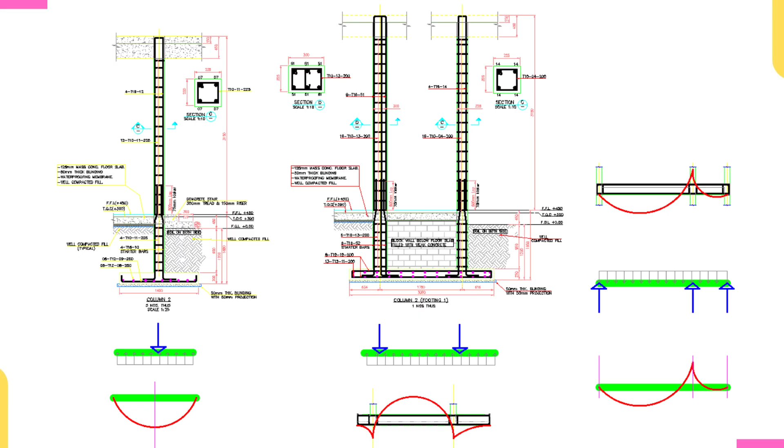I will start by first explaining the basics, which is why the tension zone in every beam must be reinforced. As we all know, if a uniformly distributed load or even a point load is applied to a beam, that beam will be subjected to tension and also to compression. Look at it, the bottom part will be subjected to tension, while the top part will be subjected to compression. What do we mean by tension? We mean by tension that it will be stretched apart, and compression in the sense that they

will be coming together. And as we all know, concrete in general is very weak in tension. Once it is subjected to tension, it will stretch apart, which will result in failure. So for that reason, in every beam, we always reinforce the tension zone, because concrete is very weak in tension, and once a beam is subjected to any load, this tension zone is prone to failure. That is why in all our beams, we always reinforce our tension zone.

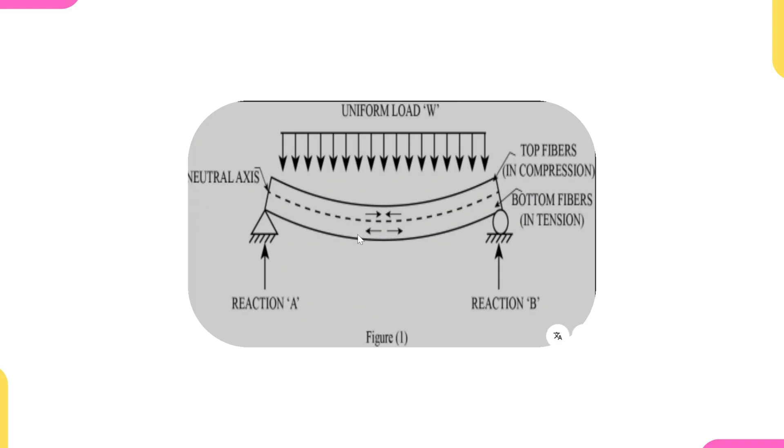Then coming over to a cantilever, as we have explained before, concrete is very weak in tension. If this is a cantilever and we apply a load at the extreme, the top part will be the one in tension, while the bottom will be the one in compression. Once we apply a load to this beam, it is the top part that will be stretched out, and this stretched part is in tension. If it is not properly reinforced, it will fail from this tension zone, because concrete is generally weak in tension and very good in compression. This compression zone will not fail, but as a result of the tension zone failing, the compression zone will also fail.

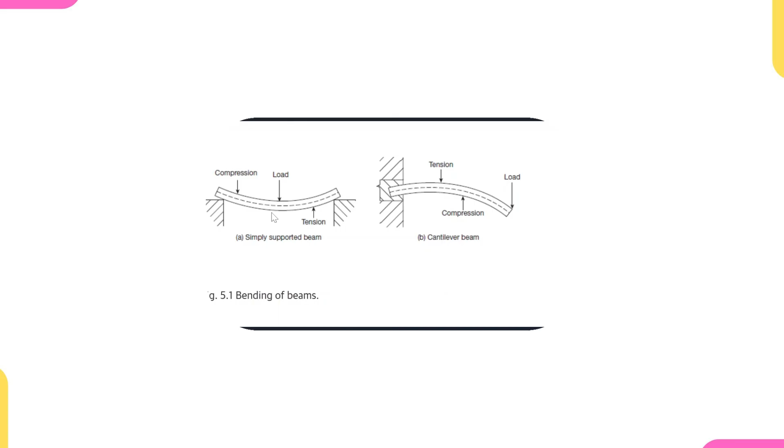So to counter this, in cantilevers we provide reinforcement at the top portion, while in beams we provide reinforcement at the bottom portion, but this is only applicable to simply supported beams. In continuous beams, the support parts are subjected to tension, but we'll explain that later. I just want you to understand that in a cantilever, the top part is the one subjected to tension, and in a simply supported beam, the bottom part is the one subjected to tension. And concrete is very weak in tension. That is why we always reinforce the tension zones.

So let's now come over to combined footing and isolated footing. I'll explain using this diagram below. But first of all, let me explain combined footing before going over to isolated footing. First, this is the footing base, which is this one in green color, while this is the column, and this column is transferring its load to this footing base.

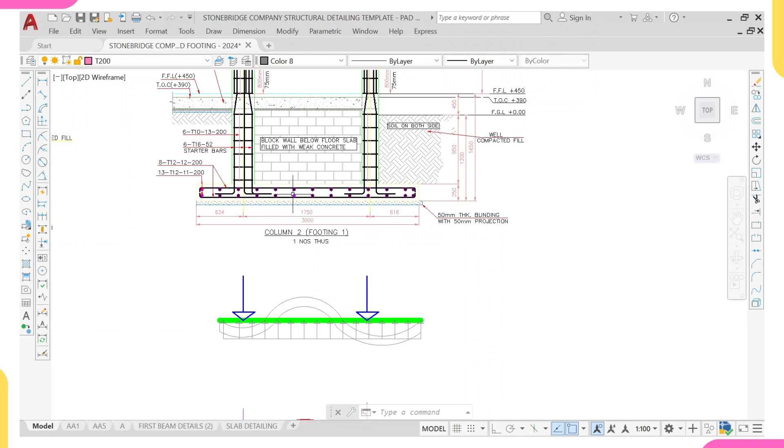And so look at this point load now. This point load means column. This point load is something as this column. It is transferring its load to this footing base, which is this one in green color. Then we are having this uniform distributed load, which is the soil. It will try to resist the load that this column base is transferring to it.

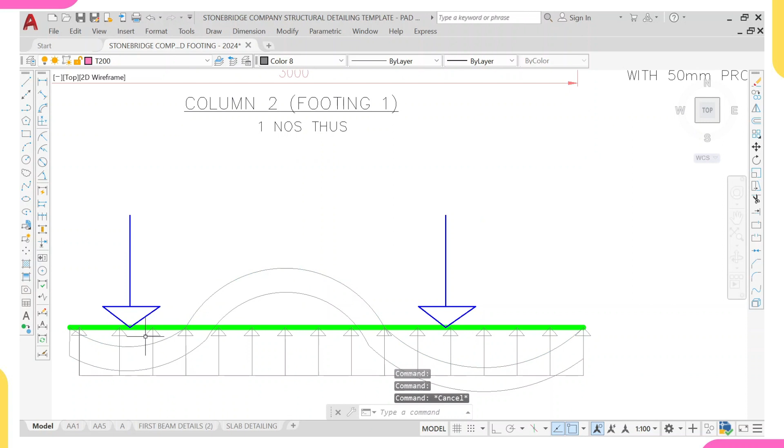So these ones now are just the way this beam, this footing base, will deflect under this column load. That's these ones, and then these ones. It's just the way this footing base will deflect under this load. So let me explain it now. So if this column transfers its load, this beam will deflect like this, meaning that this top part will be under compression and this bottom part will be under tension, meaning that we'll have to reinforce this bottom part.

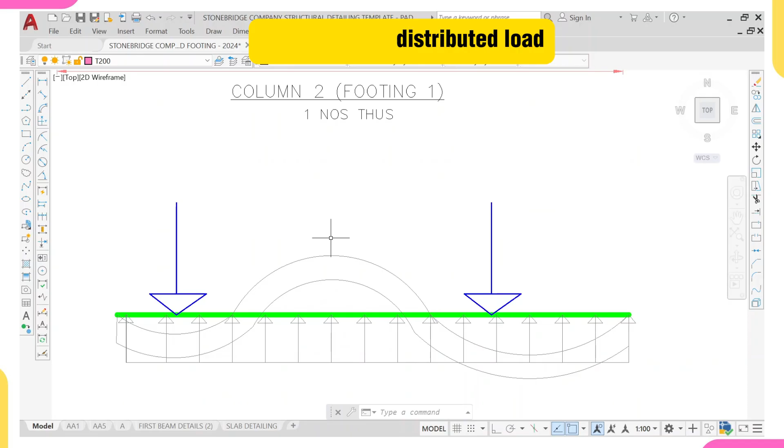Coming over to this point, the only load being applied to this footing base is this soil, which is this UDL. So this UDL will try to deflect this beam upward like this, meaning that this top part will now be under tension, while this bottom part will now be under compression. Take note, at this point now, this top part is under compression, while this bottom part is under tension.

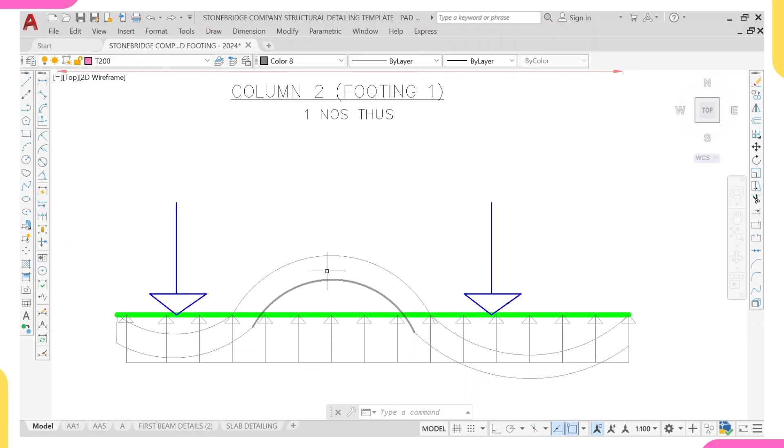While at this point, this top part is under tension and this bottom part is under compression, meaning that within this portion we will need to reinforce this top part, because it's this top part that is under tension. While coming over to this point now, this column load will cause this thing to deflect downward, meaning that this top part will be under compression and this bottom part will be under tension.

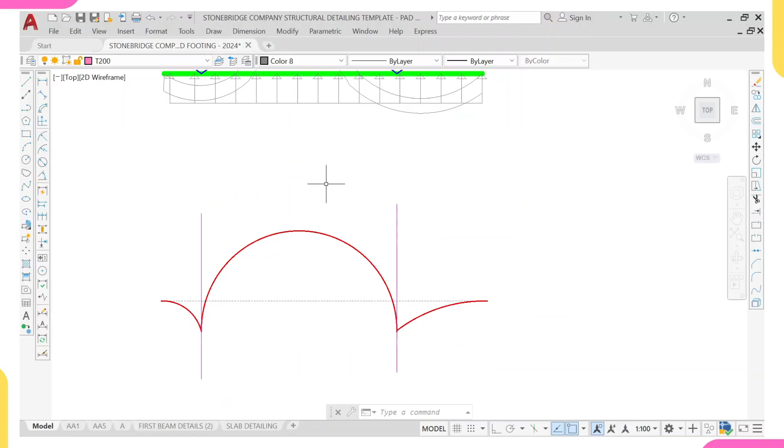So look, this is the bending moment diagram. This is the deflection diagram of this. Then this is the bending moment diagram of it. So that means we're having moment at the base, moment here and also moment here. So for that reason, we will reinforce the bottom to counter this moment, and we also reinforce the top to counter this moment, because this top part is the one under tension, and wherever we're having tension, we'll be having moment there.

See here, the tension zone is the bottom. That's why we're having a moment here, because the tension zone is at the bottom. So in this combined footing, we will reinforce the top zone to counter this moment, and reinforce the bottom zone to counter this moment.

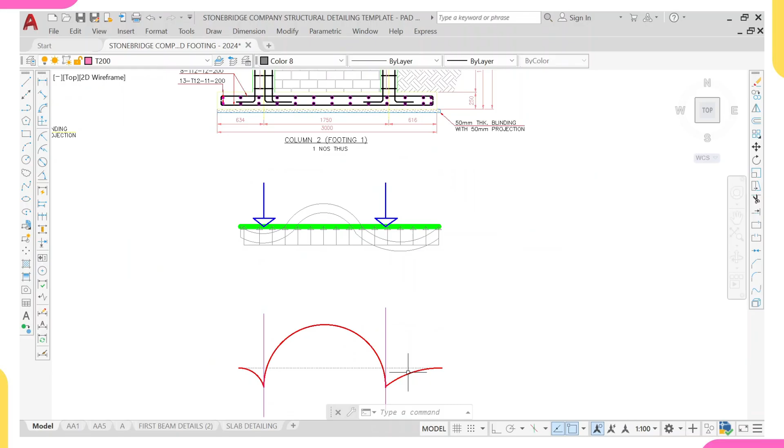While coming over to isolated footing, in isolated footing, this is the column, this is the footing base, while this is the soil serving as a UDL. So this is how this footing base will deflect once this column load is applied to it, meaning that this bottom part will be subjected to tension, and this top part will be subjected to compression. Remember, concrete is very weak in tension. We will only reinforce this bottom area, leaving this top area.

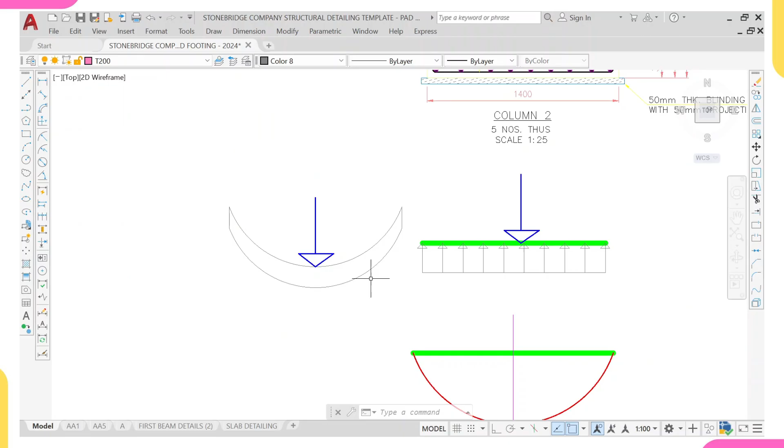So this is the bending moment diagram. So if you see, in isolated footing there is no need to reinforce the top, because there is no moment at the top, only at the bottom. That's why in isolated footing we will reinforce the base, not the top. While in combined footing, we will reinforce the base and the top too, to counter this moment.